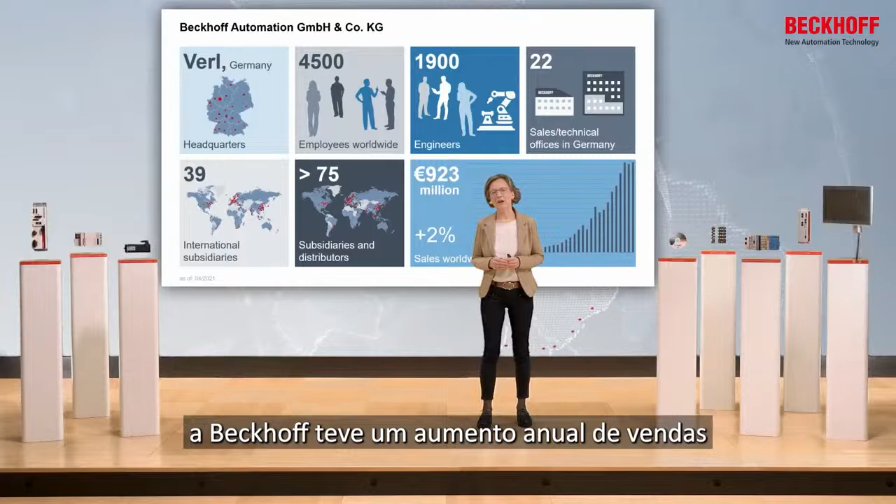The headquarters of Beckhoff Automation is in Germany. Beckhoff employs 4,500 people worldwide. Beckhoff had sales of 923 million euros in 2020, and in the last 10 years, Beckhoff had an annual increase in sales of about 15%.

Beckhoff is represented in 77 countries around the world. Our goal is to be as close as possible to our customers. We want to speak in the customer's language and understand their needs.

And so, we are proud to have a partner in Bresimar since 2003, who perfectly represents Beckhoff in Portugal. 14 people at Bresimar offer machine builders and machine users excellent support, training and service for Beckhoff products on the Portuguese market.

Beckhoff Automation develops and produces industrial PCs, bus technology, drive technology, and the TwinCAT automation software. These technologies can be used for the realization of Industry 4.0.

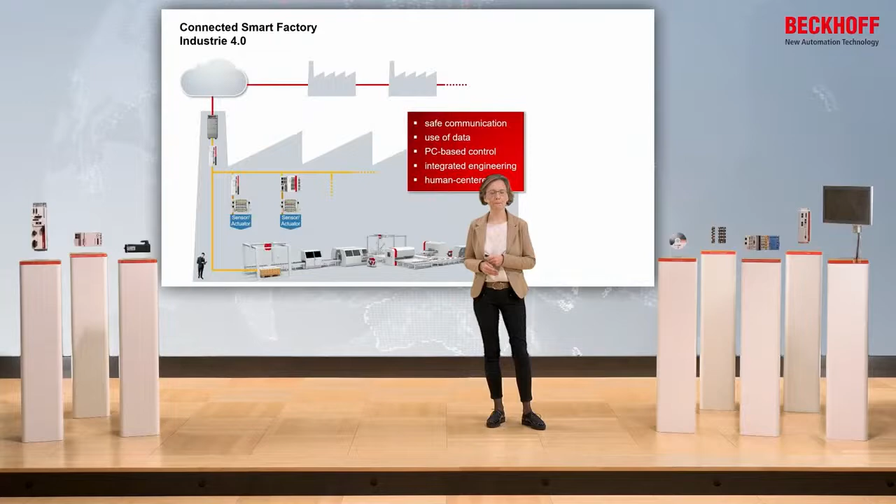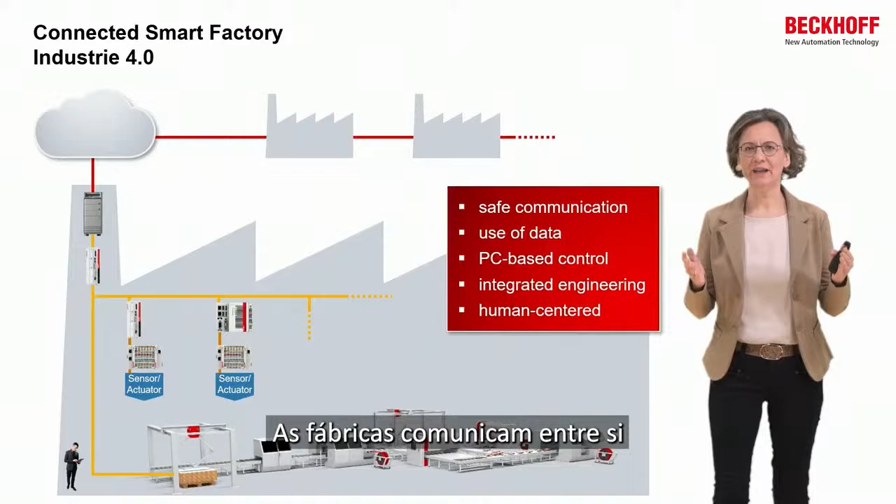For us, Industry 4.0 means the connection of smart factories across value networks. The factories communicate with each other and optimize their value chain across the board.

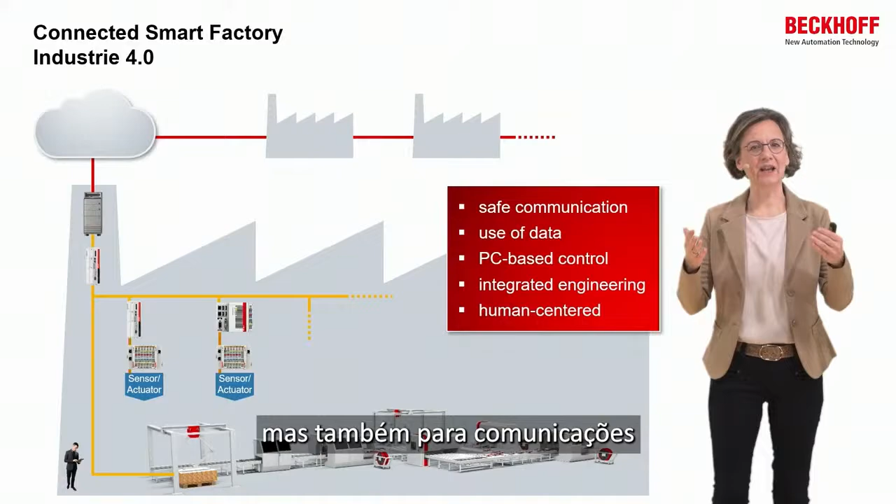For this, first of all, secure communication is required. Therefore, Beckhoff provides several protocols for communication between the factories, but also for communication within a factory between, for example, machines. The second important point is data.

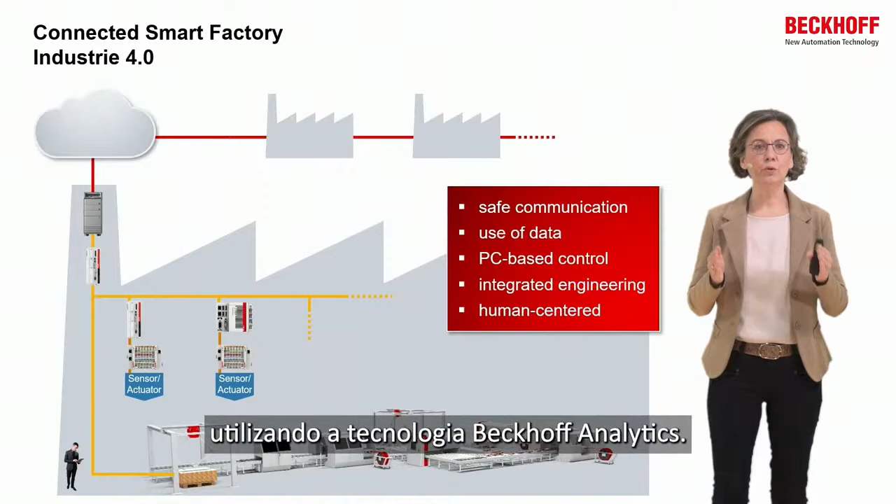The data is recorded by sensors on the machines and collected and evaluated using Beckhoff analytics technology. On the basis of this data, machine processes are controlled and optimized. Also, Beckhoff technology can be used for the engineering of the application.

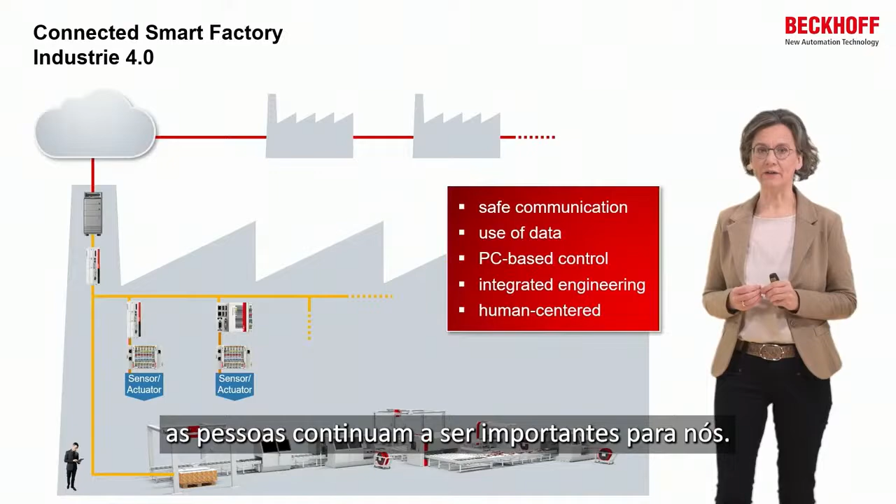And at last, people are still important to us. Humans remain responsible for the process, and they are the decision makers.

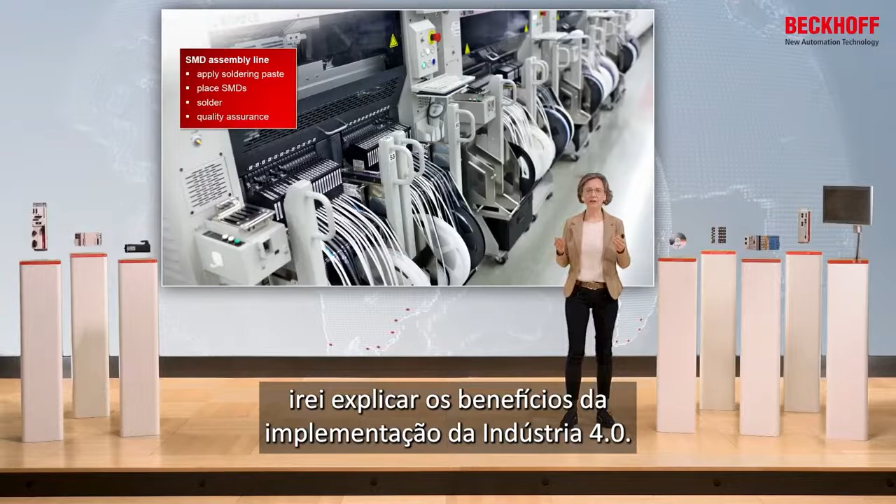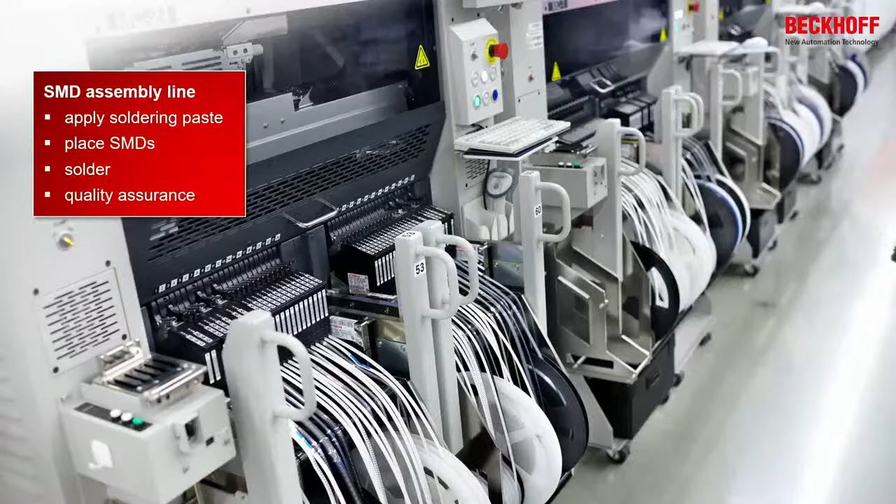Using the example of an assembly company, I will explain the benefits of an Industry 4.0 implementation. The mentioned company has 9 production lines, each with several assembly and soldering stations.

They produce, for example, circuit boards like this one. In the production process, at first, the soldering paste is applied. Then the electronic components, such as resistors and transistors, are placed by robots. After that, the components are soldered on by heating, and finally the control takes place.

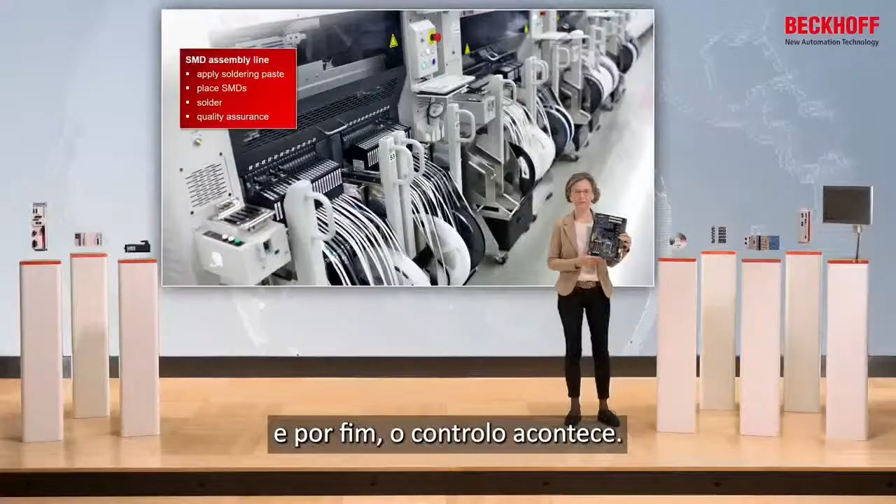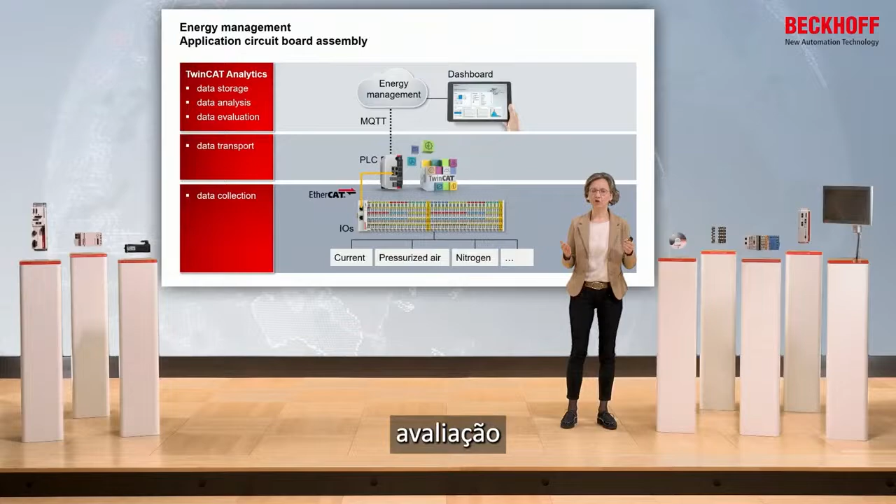Two years ago, the company introduced an energy management system using the Industry 4.0 approach. The core of the solution is the collection, evaluation and communication of energy data, realized with TwinCAT analytics from Beckhoff Automation.

At each machine, sensors record the consumption of electrical energy and pressurized air. The sensor data is collected using Beckhoff fieldbus technology and forwarded to the machine's industrial PC. The industrial PCs communicate the data to a higher level energy management system in the cloud using standard protocols.

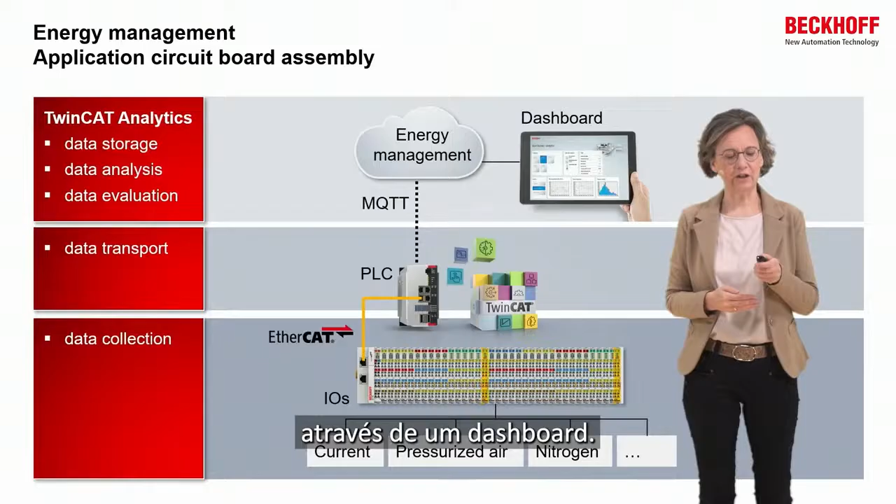In the cloud, the data is evaluated, analyzed, and also stored. The user can view the evaluations via a dashboard. Here you can see an excerpt of the evaluations.

At the left, you can see the energy consumption in standard mode. The machine works. During breaks in the past, the machine was switched to standby mode. See the energy consumption in the middle.

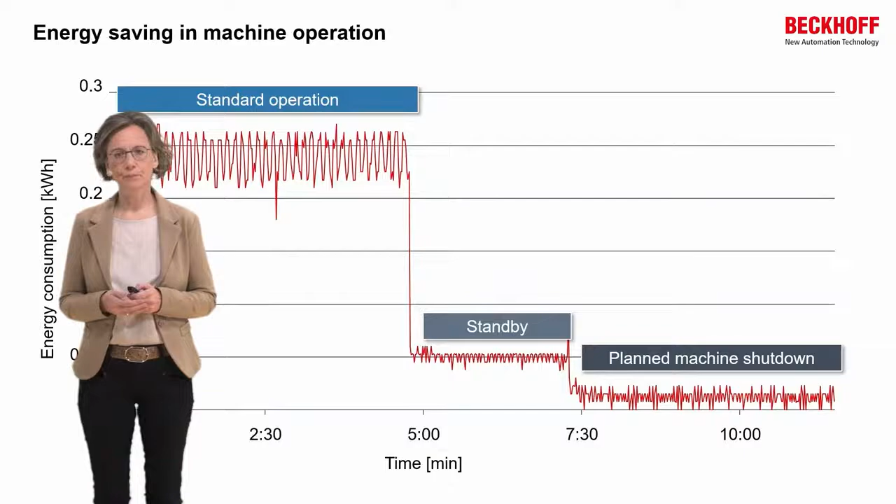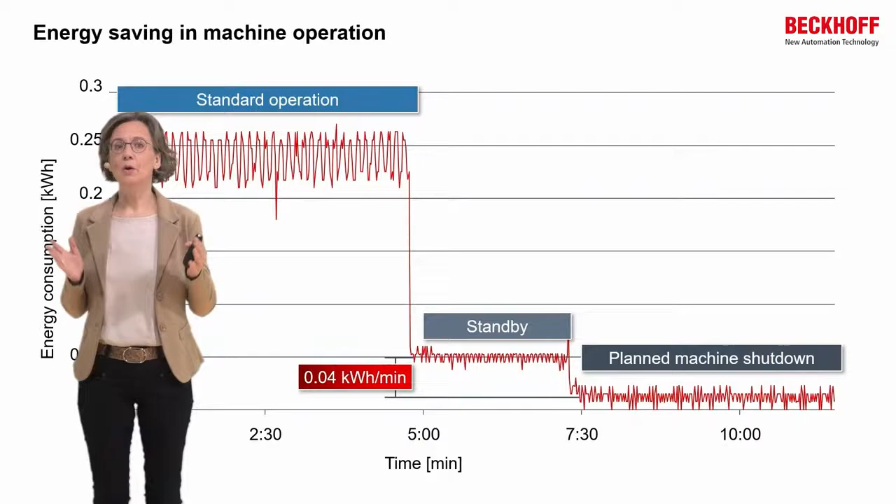Today, the machine is to be shut down completely during the breaks. See the line on the right. That leads to savings of 0.04 kilowatt hours per minute per machine. Taking into account all influences on production, TwinCAT Analytics determines the ideal time to switch off the machine.

Extrapolated to the entire machine park with the 9 production lines, round about 11,700 kilowatt hours per year can be saved in this way. And if you look at the energy costs, you will save over 1,700 euros per year.

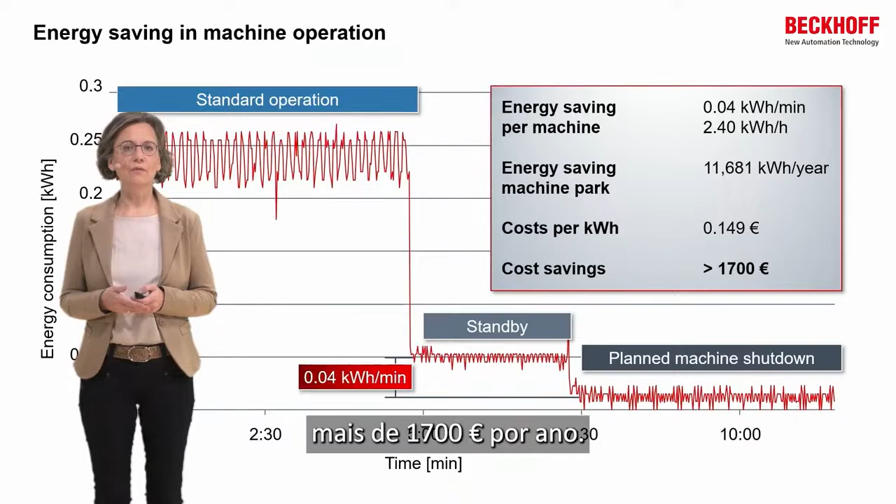And taking this into account, you come to the conclusion that these savings are realized only through the usage of communication technologies and data analysis, thanks to the usage of Industry 4.0. And so machine builders and manufacturing companies are able to secure their long-term competitiveness and at the same time increase their sustainability. This is realized through Industry 4.0 using Beckhoff Automation Technologies in cooperation with Bresimar in the Portuguese market.